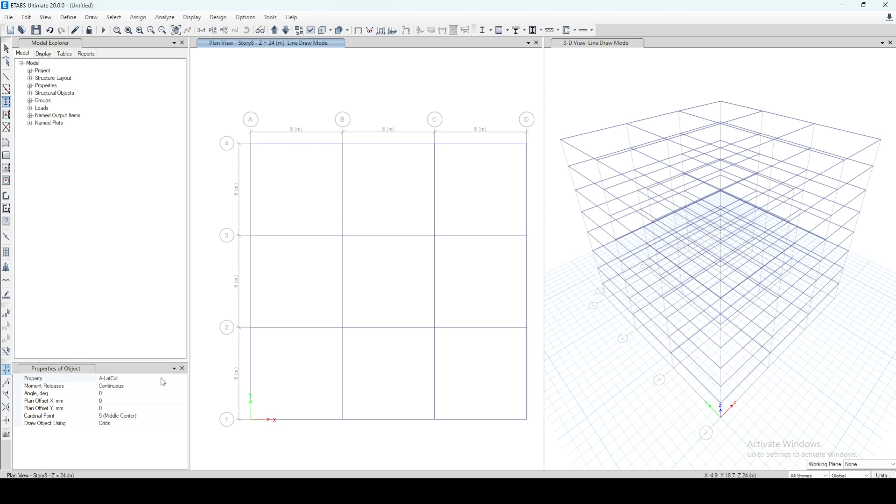Okay, let's try the static force procedure here. First, let's try creating the model first: concrete beam, all stories. Let's try, then column, okay, concrete column, then diaphragm. Okay, let's build up the model first.

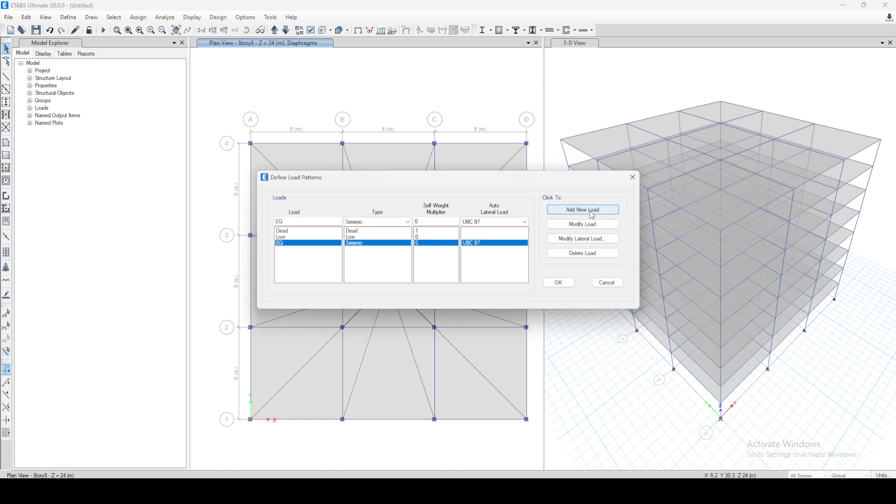Okay, let's apply. So first, we will define the load patterns. Load patterns, that is the earthquake. So earthquake, let's try doing it, both x and y direction. So this is both x and y direction, and for basic purposes muna, hindi natin i-consider ang accidental torsion or eccentricity application muna, just basic x direction, y direction.

Anyway, our main point naman is para sa base shear lang naman, at saka sa mga story forces. So if this is concrete, just change it to 0.03. Then let's try the problem here. We input the

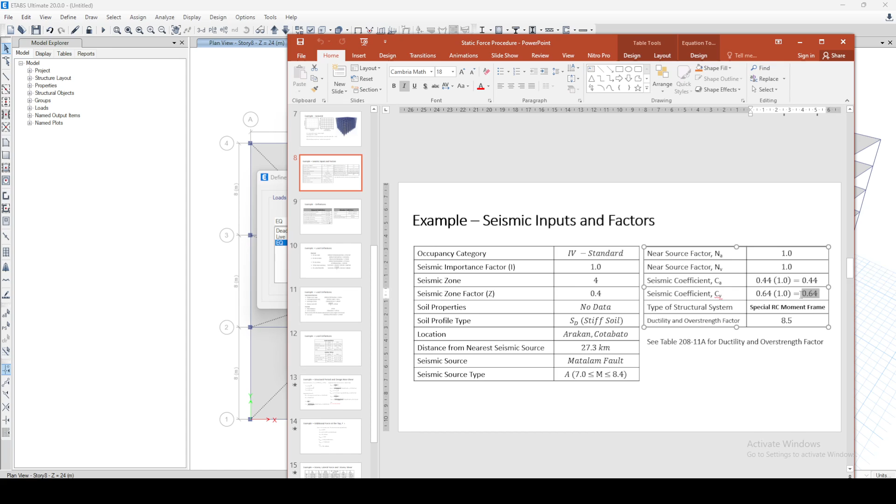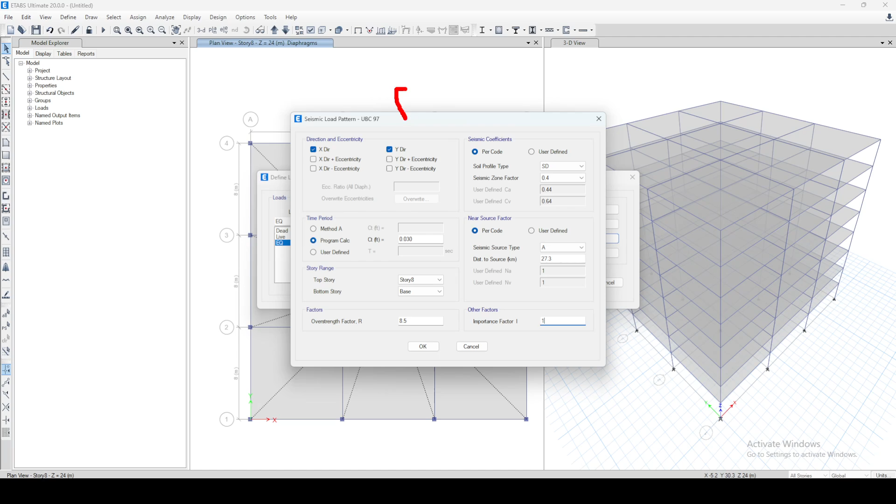this example here, previous example, that is no data, SD stiff soil, 27.3, and seismic importance factor. So 0.44 and 0.64. Seismic source type A, 27.3 ang distance. Then SD, if there is no data available, so 0.44, 0.64. Importance factor I is 1, since this is just an office building, and overstrength factor R, we assume this is the SMRF, or the special moment

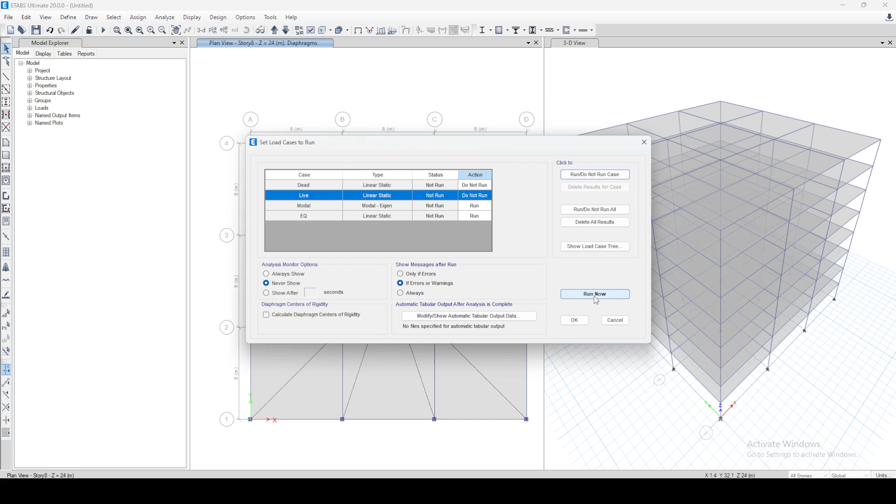reinforced concrete frame. Okay, then we just try analyzing it, set load cases, we just don't run this and run now. Let's try running this one, and let's say static force procedure, or ELF example. This is just 8 story. So while running this program, we will see how much is our base shear now, and you can compare this one to others.

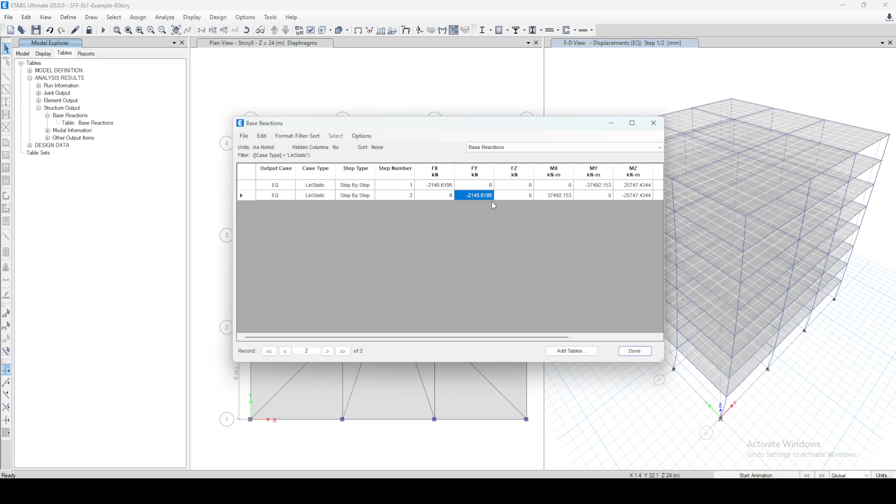So after analyzing, to see the base reactions or base shear, you can go to this display. But anyway, we have what we call the base reactions: element structure, base reaction table. So our base shear, just linear static, is negative 2,145. That is our base shear. This is for y direction, and this is for x direction. Since the building has a square footprint, almost the same ang kanilang base shear.

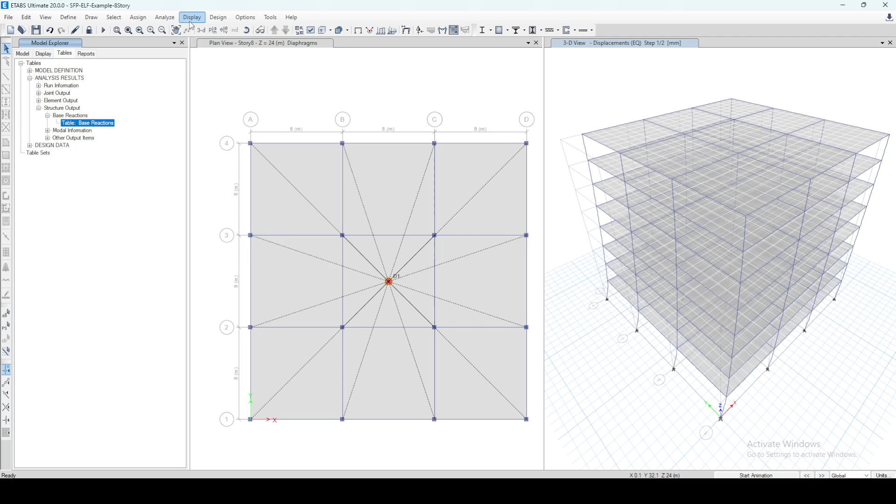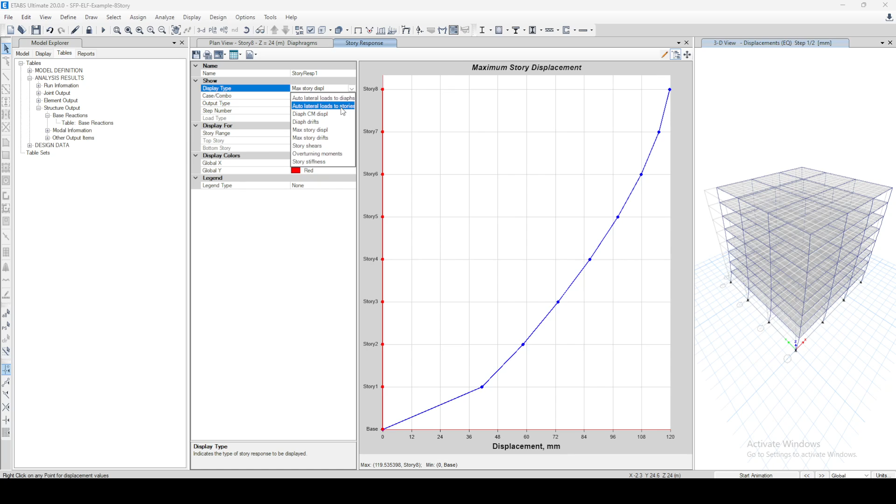But anyway, if you want to see more, just go here to the story response plots. That is just the model sa earthquake natin, static force procedure. So step 1 is our blue, that is x direction, then step number 2, the red, the y. So almost the same naman sila sa displacement. If we want to see the lateral loads, this is the lateral loads. If you want to see the values, just click formatted, and these are the values for the forces.

Now, these are the forces at story 8. So if you want to see the shear, just click here, story shears. That is the x direction, this is the y direction. And if you want to see the result, just click the formatted, and you can find it here. So you can see both top and bottom is almost the same naman, don't worry. So yan lang yon.

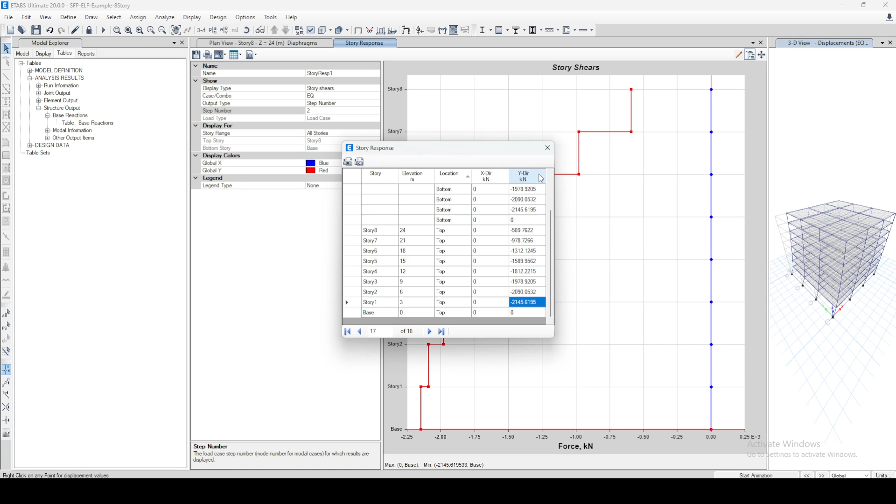As you can see, negative 2,145.6195 ang kanyang story shear. Yan yung story shear niya without considering first the eccentricity. So negative 2,145.6195. So let's try comparing it to the base reaction. Load case negative 2,145, so same.

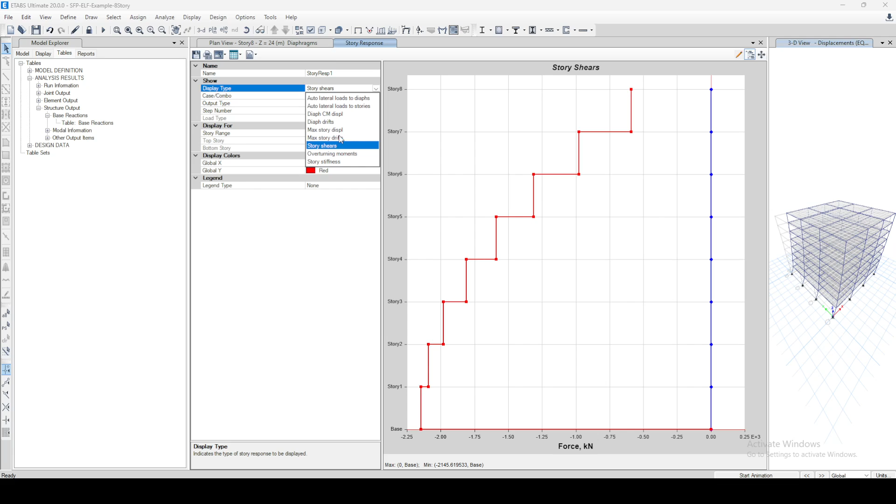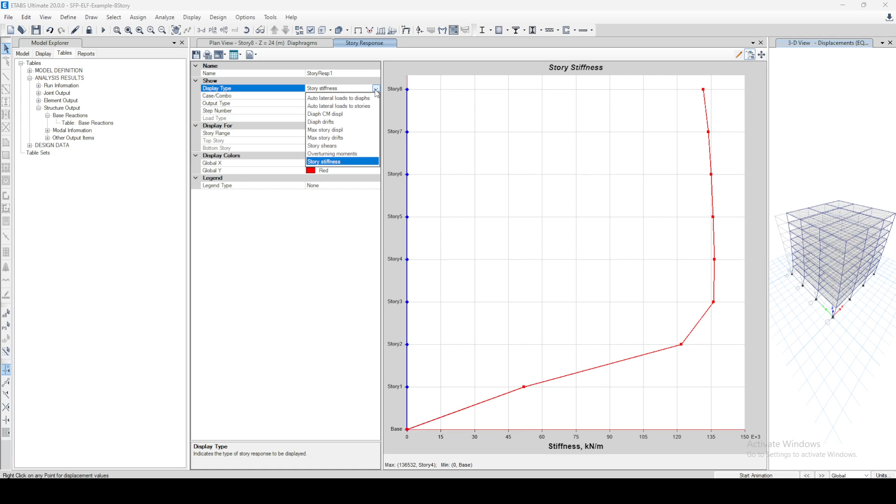This is our story response plot for shear, and you can use this one for story drifts. This is the story drifts, the overturning moments. We also have story stiffness, so we can check if this is a soft story, etc. We also have lateral loads to diaphragm and lateral loads to stories, almost the same. So these are all our results. This is the response of the structure to the static force procedure.

So that is the static force procedure, and you can find the result in this formatted part.